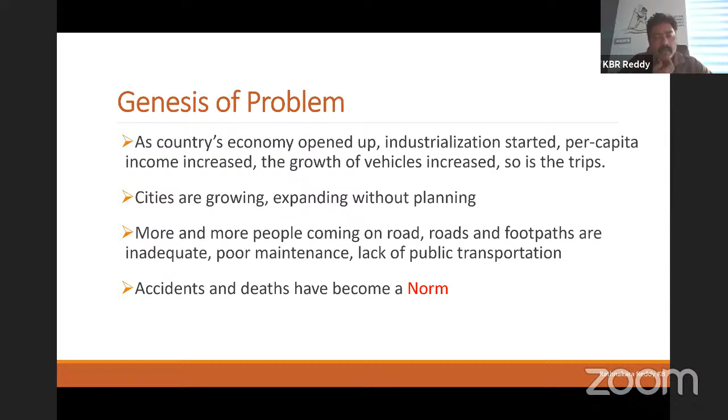Added to this, we are adding more than 200 to 300 towns every year, as per the census. So we have more than 11,000 towns in our country, and these towns and cities are growing day in and day out because of the increase in population. And these towns and cities are also not planned, they are just growing out of proportion. So again, the safety and all the issues fall in place. As there are more vehicles on the road, more people, accidents will happen and are happening.

Now, you all know that these are all managed and governed by the government, state governments or central governments. And what is the government doing? Of course, we can't say the government is not doing anything; they are doing certain things. For example, if they think the road is narrow, they are widening some of the roads, 4 lane to 6 lane, 6 lane to 8 lanes, they're adding more lanes.

If they find that a junction is a problem, they're constructing an underpass or flyover. And they also talk about building access controlled highways, called expressways. And they also conduct road safety awareness programs. The government is doing a lot of things, but on the ground, it is not reducing our accidents and fatalities.

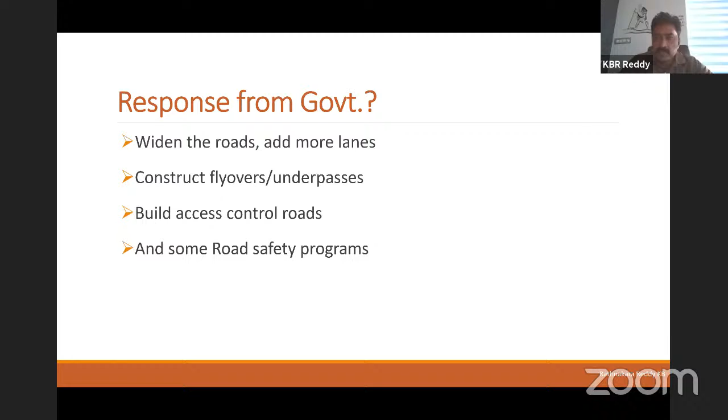If you look at the statistics of road accidents in India, these numbers are for the year 2016, but in 2017, 18, 19, except 2020 because of COVID, the accidents and fatalities have not come down. But on average, every year about 4 lakh accidents happen on Indian roads. Out of 4 lakh accidents, at least 1.5 lakh people die, and more than 5 lakh are injured. And these are all as per the recorded accident statistics.

So what it translates to is there were 1,317 accidents and 413 persons killed every day on our roads, which again translates to 55 accidents and 17 deaths every hour. And you will be surprised to see that there is one death every 3.5 minutes. So in the one hour of this lecture, about 60 minutes, roughly 15 people would have already died in road accidents. I think it is really worrisome, and it has to be brought down.

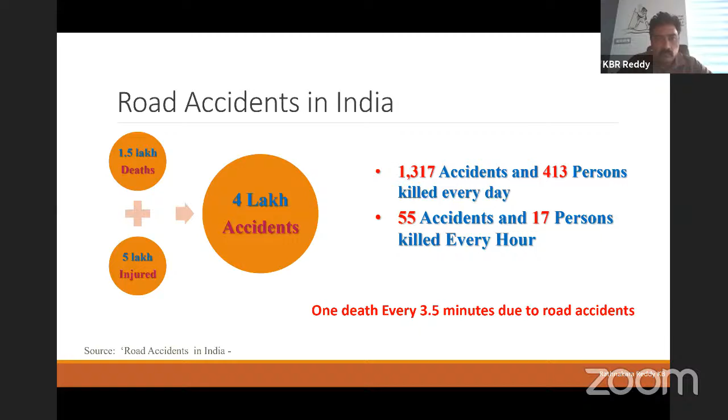Now, coming to cities. These are all states, and accidents do happen in cities, towns and highways. In cities, Chennai has about 7,500 accidents, Delhi has 7,000, Bangalore has 5,000, then Indore, Kolkata, Mumbai. So it again shows cities are not very safe, and accidents happen there very often. And if you add all these 10,000 towns, obviously you'll have more accidents.

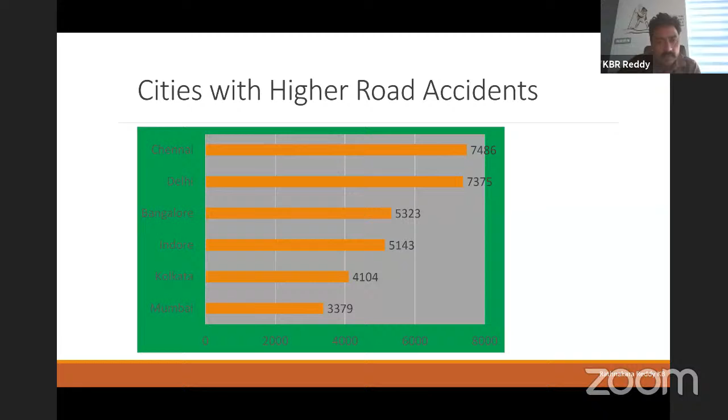We all know that the causes of accidents are many, including user behavior, driver behavior, road design aspects, infrastructure, all that. From the statistics report, a published report, 9,500 accidents occurred and resulted in the killing of 3,396 people on speed breakers. Wherever speed breakers have been constructed, they are supposed to reduce the speed of vehicles, but they have become killers.

Why? Because of lack of painting of the speed breakers, lack of information, lack of signboards which inform the driver in advance that there is a speed breaker, so they come at very high speed, the accidents happen and people die. The other contributor is potholes, especially in cities, towns, and roads that are not managed well; more than 2,300 people die just from potholes. We should be ashamed as transportation and civil engineers that we allow people to die because we have not maintained the roads well.

Then, where there is two-way movement of traffic, it is more prone to collision. If it's a single carriageway, and most rural roads are single lane carriageways, there are more accidents. On four-lane divided and six-lane roads, accidents are less, but fatalities will be more because of the speed. That's a different discussion itself.

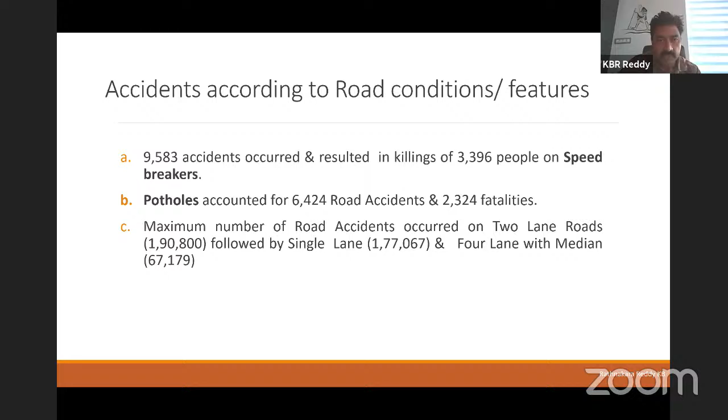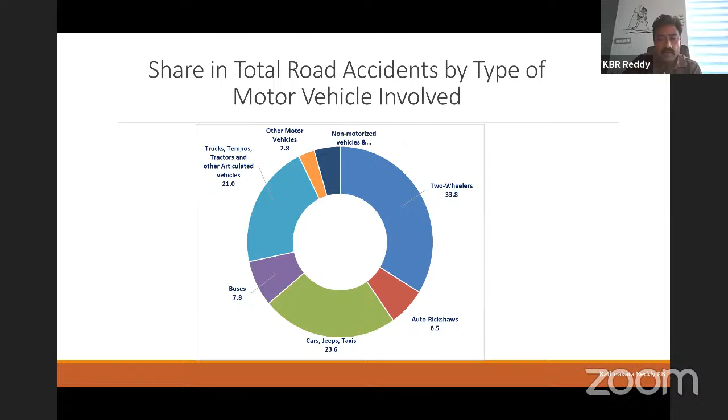So the point I want to make here is we have to see which vehicles are vulnerable, right? And whenever we are doing the design, we should make sure they're all considered in our safety aspect. And then that is the accidents slide. And if you see fatalities, the number of people killed because of an accident, with respect to the vehicle they use, again it is two-wheelers. Again, one third of the total people who die is because of two-wheelers. And next is cars, and next is your other motor vehicles.

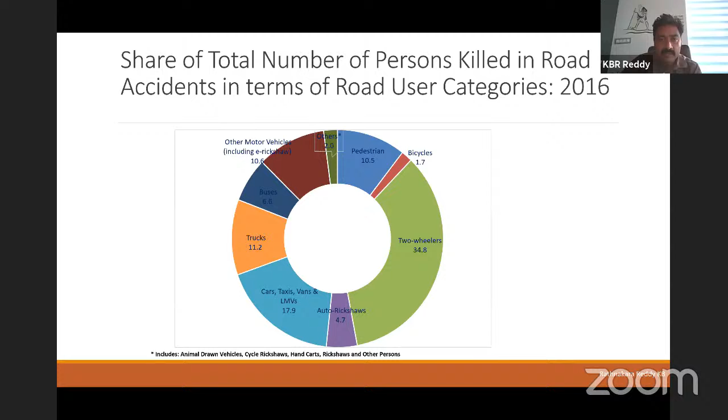So again, the pedestrians, if you see on the top in blue color, it is about 10%. And bicycles is 1.7%. Though in most of our cities we don't use bicycles any more. They will be mostly in small towns. But pedestrian accidents and pedestrian deaths is an alarming issue, and it's causing a worry for all the urban road safety engineers because we are not building safer footpaths and safe road crossings for them.

Well, then what happens when an accident happens? The police department, they are the enforcing agency. They go and record based on their information what is the cause for the road accident. And if you look at here, the majority, more than 80% of the reason is fault of the driver of the motor vehicle. Driver fault is more than 80%. And then you have all minor things, okay? But if you see the red color what I marked, engineering or designing fault of roads, defect in road condition, it is very minuscule.

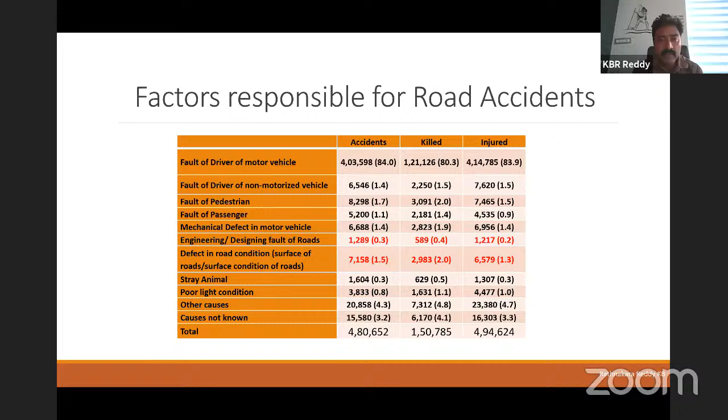But don't get misled by these numbers. What happens in an accident report is the insurance aspect is also attached. So it's a long theory. They will make sure that it is not because of any design fault of the road or anything. If they really did that, the insurance will not be able to be claimed by the person who made the accident. That's why they give all other reasons. But we must all know that there is a significant contribution of our road design and road infrastructure in the accidents.

So when we say safe or safer or safety, what does that safe mean? Safe, in terms of the design of our roads and road infrastructure, means safe and comfortable for pedestrians, first priority. Safe and convenient for vehicles. Safe and hassle-free for the houses or establishments to get access. And safe and sustainable for the environment. So all these are part of safer designs, right?

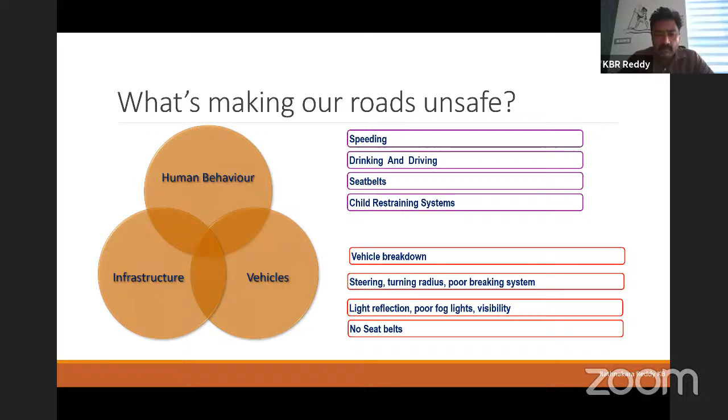And when we are making the road infrastructure safe, or looking at what's making our roads unsafe, there are three major aspects. One is we've got a road, we have a vehicle used on the road, and we have a human being, that is ourselves. We are using that vehicle and we are driving on the road infrastructure. So human behavior, vehicle, and infrastructure. There are various parameters that go into each of these three aspects. So we are interested in infrastructure.

So we'll talk about infrastructure, because there may be driver mistakes, driver errors. They'll always be there. Even if you design the best road, the best intersection, chances are there might be an accident because the user of the vehicle may end up not really using it properly. So in the infrastructure or road, we have three stages. One is on the planning side, another is on the design side, and the third one is on the maintenance.

So when we say planning, where should we plan? For example, if you are designing a new national highway or a state highway, a new road. Now, if we go back as civil engineers, you might have studied transportation theory or highway design in your undergraduate, and you would have touched the basics of highway engineering, highway planning and all. In one of the chapters of highway planning, they say your road should connect to the villages, connect to the cities. That's how we learn highway planning. But in the current situation, it doesn't hold good.

When we plan a high-speed road, we actually plan away from the city and away from the town. Why? Because getting into the town is very unsafe. The speeds will come down, it's prone to accidents and all. So we go away. So planning makes a big impact in making roads safer. If you don't touch any of these towns and villages, your road will be 50% safer. And if you plan elevated junctions, flyovers, underpasses, then you are solving another 25% of accidents.

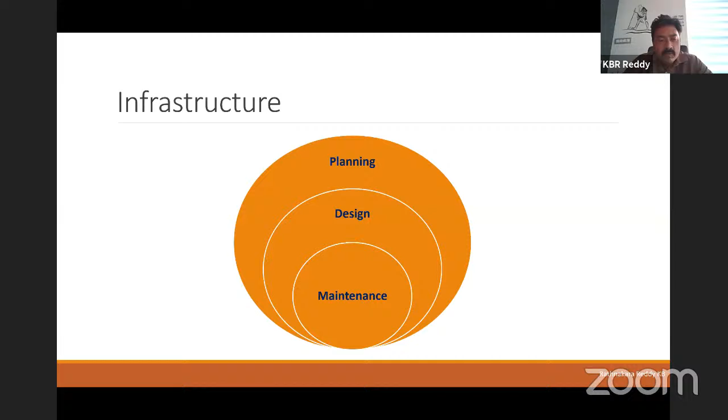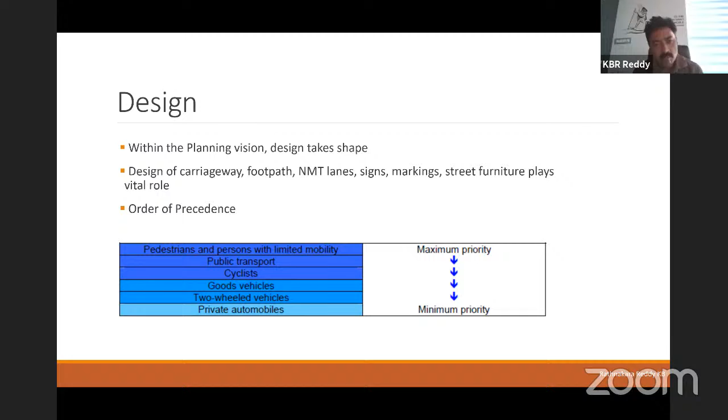Now, this is contrary to what we practice in our country. In what we practice, whenever we design a highway, we give priority to the vehicles. We start from there. But now all the safety experts and road design engineers are moving the other way around. So we are prioritizing where to start. First is pedestrians and persons with limited mobility. That is your maximum priority. Then your public transport, then cyclists, then goods vehicles, then two-wheeled vehicles, and then private automobiles. This is the priority we are moving towards in the design of urban streetscape. We are ensuring more safety and access to non-motorized transport, and then move towards motorized transport.

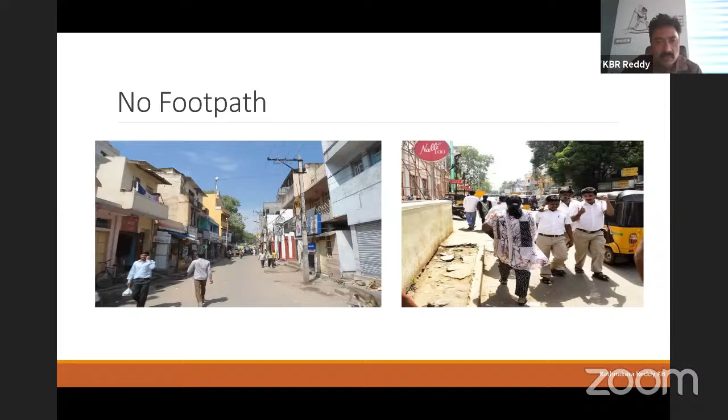For example, these are some of the designs and works we have been doing. This is a photo of some streets in Bangalore, but you can all relate this to your own towns, your own cities. If you look here, we have a road, but there are no footpaths for people to walk. In the absence of footpaths, people will walk on the carriageway. And if you are on the carriageway, you are interfering with the space meant for vehicles, and the resulting consequences are accidents, right? Elsewhere you have very wide footpaths, but there is no space for people to walk. In the absence of space to walk, they will again enter onto the carriageway, and again it leads to accidents.

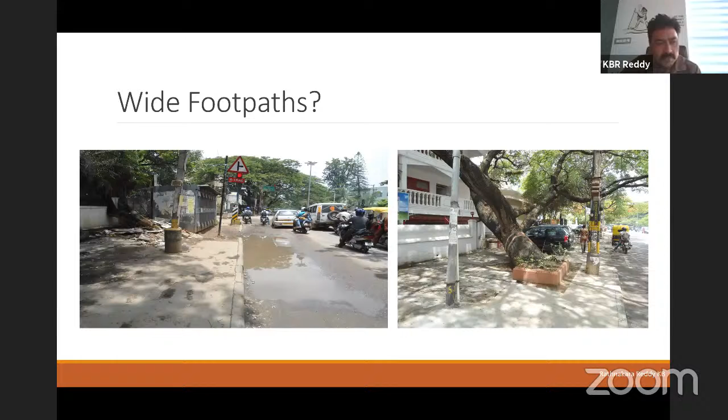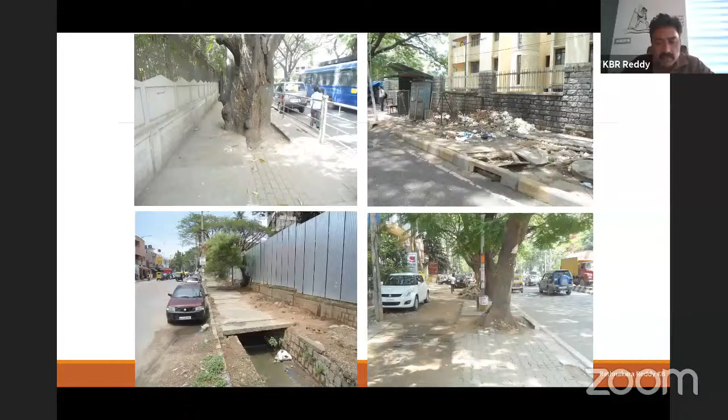Then you have some footpaths, but there are so many obstructions on them, or you dump a lot of things, or you don't give proper drain slabs and all. People walk on the footpath and trip on these surfaces. Then there is unsafety. Then you have seen this very common way people cross the roads: traffic police put some barricades, and people try to cross over those barricades, again unsafe.

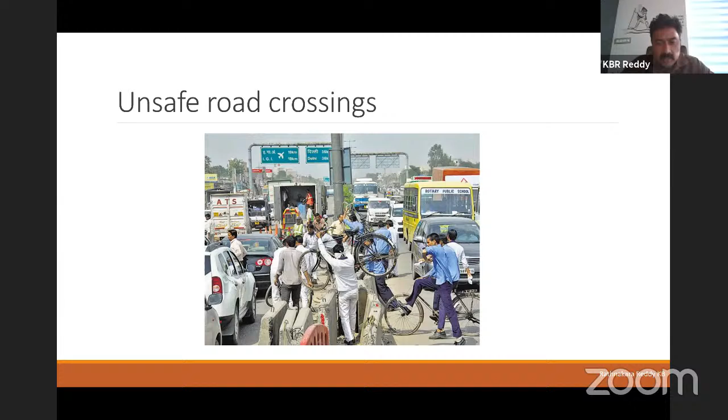Then come to junctions. In every town, every highway, every city, we have junctions, and junctions are very accident prone. Of all the accidents, up to one third happen at junctions, right? And if you don't design, if you don't channelize, it is open for anybody and everybody to go in whichever direction they want.

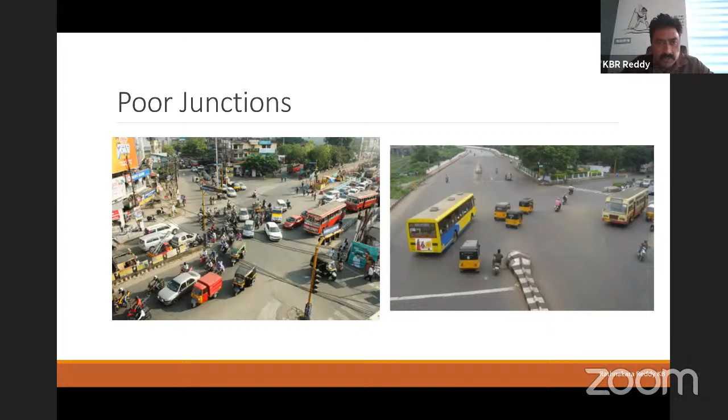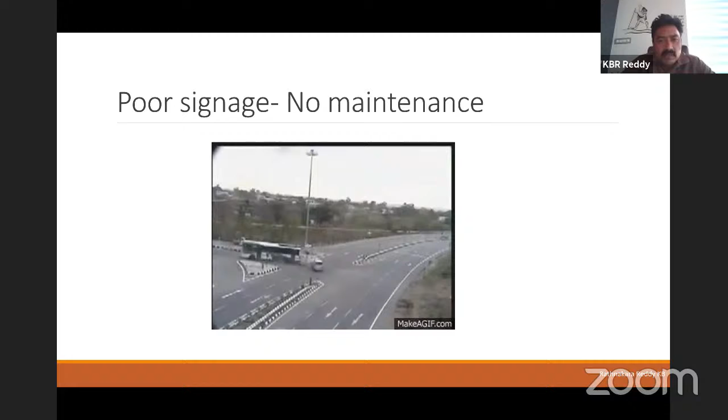And the maintenance part: if you don't maintain something like this, it is bound to cause accidents and loss of people. If you see this old video from our own highways, this is a fairly well-designed junction. But you see the accident in daylight, only because there are no signboards, no indications that vehicles are moving here, and there is no signal. You can never have a junction like this with no signal. So the accidents do happen.

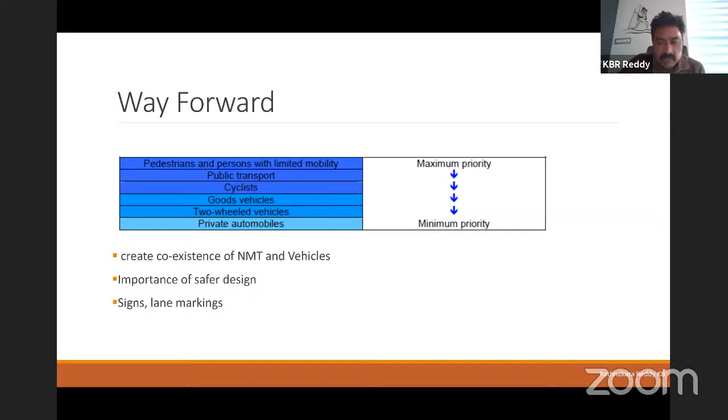So the way forward is look at this priority, and then make sure we design the infrastructure in a right way. So I will just take you through one or two design junctions that we have been designing. This is a road in Bangalore. This is an airport road in the city.

So when we went through this entire stretch of about 6 kilometers, we found there are junctions which are to be redesigned, not very safe. So basically, we identified which are the bottlenecks, and the objective for us is to make sure the junctions are designed and made safe, and also allow the through traffic to move continuously, hindrance free. Okay.

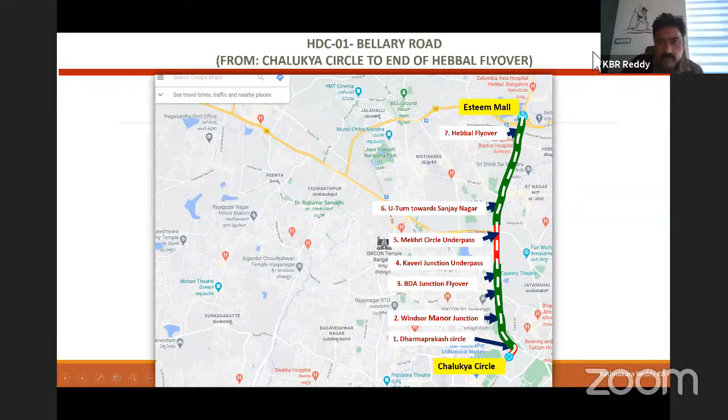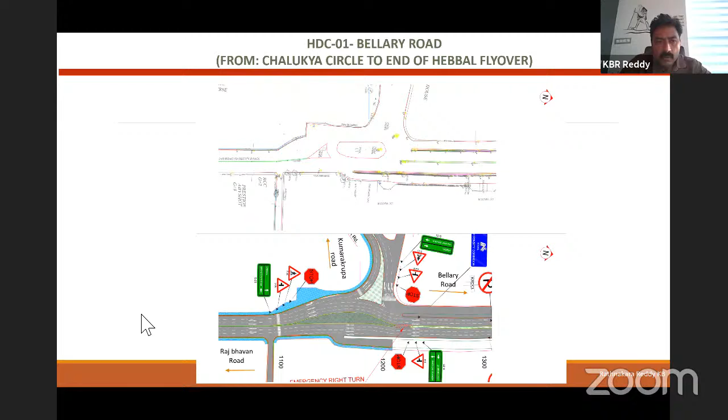So we have one more junction. Just give me a minute.

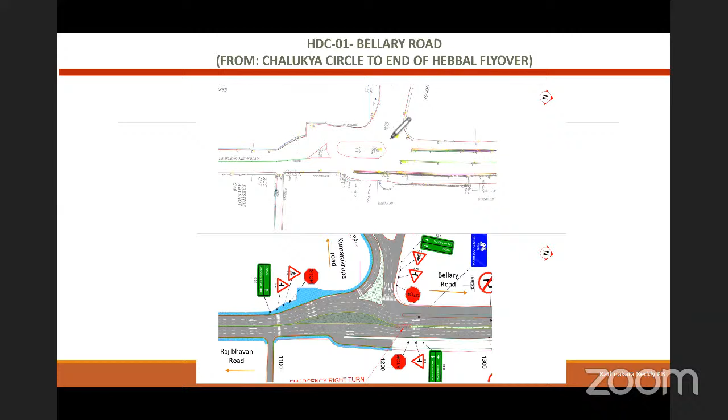Okay, so if you look at this junction, okay, now this is a three-leg junction, and what's happening here is, again, a kind of island is created here, and there is another channelizing island. So the vehicles would come like this, wait here for the signal, take a U-turn like this, go here, and these vehicles come here. Look at this geometry and all this.

Okay, so they'll wait here for the signal, and they go all the way like this, right? And the right turning traffic here, again they come here, take a right turn like this, and go based on the signal or traffic police directions. So what we did to this junction is this.

We actually closed this median, right? And there was already some kind of mural present here, and we did not want to remove that. That's why we created a kind of landscape like this, so that the mural is protected, and also we'll have a smooth geometry. So what we made essentially here is we closed this median and made all this movement through.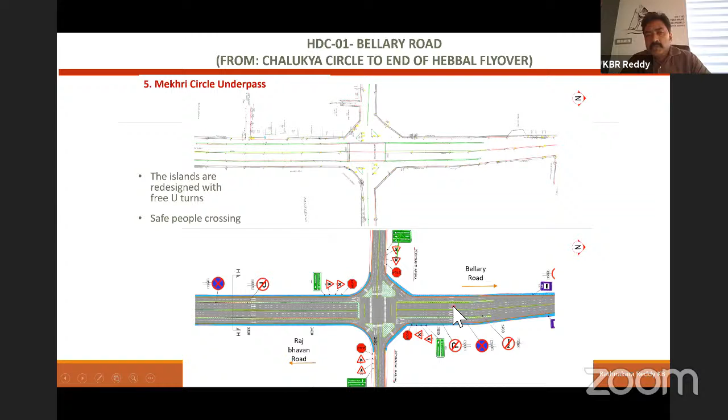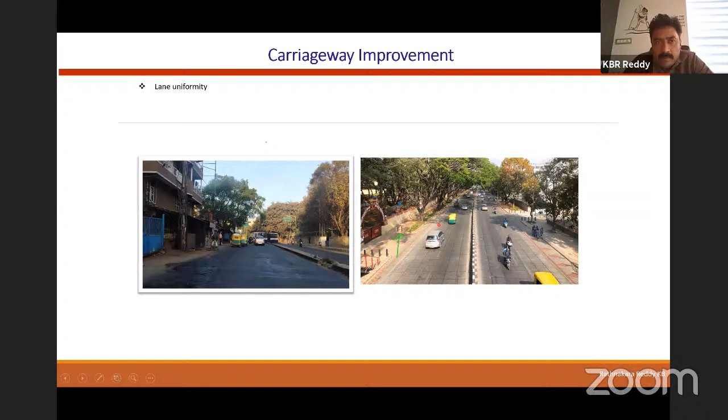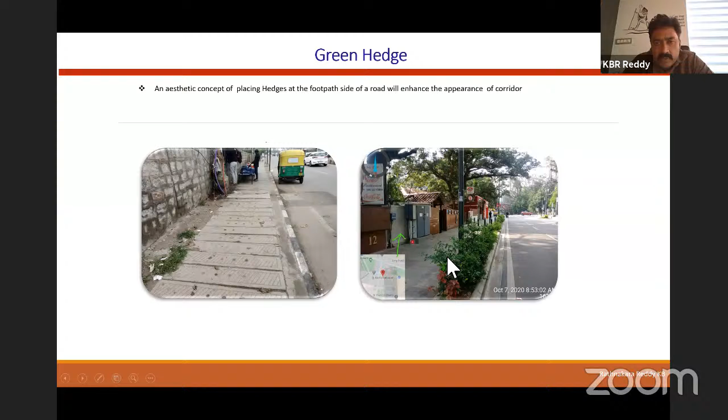So like this, all these junctions have been redesigned. And then the carriageway, the median, the footpaths: if you see a road like this on the left, we easily converted it to a road like this on the right. These are all in the design. Footpaths, this is how the footpaths work. You convert these footpaths into safe and walkable. Same again, this is how the footpaths convert into safe, walkable ones with some greenery, a pleasant appearance.

Then, now you might have heard, in Bangalore we are doing something called TenderSURE design of roads. Then we are doing smart cities, and now throughout the country everybody is taking those design aspects. The idea is, if you have a road like this, you've got about 4 lanes or 3 lanes and footpaths like this. Can we make this an inclusive road, so that there will be fast moving vehicles, slow moving vehicles, and all? How about converting this road to something like

this? You have a road like this, a couple of lanes, and a narrow footpath. Just convert this into still your 3 lanes. You create a cycle lane, then you create a good footpath. There is a traffic signal for safe crossing. There's a raised pedestrian crossing. Look at all this. Can you make this road more lively? How dull and boring this road is, and how safe and vibrant this changes.

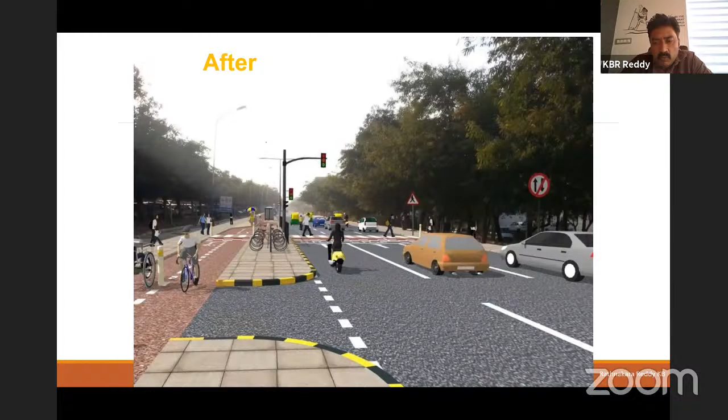And this is what people now want, and the planners and the designers are also working towards making these urban roads and streetscapes more safe and vibrant. Similarly, we have a metro going on, and it's fairly good. This footpath is good, and you've got a good carriageway here. Someone might say, what's wrong with this? There's nothing wrong with this. But we can still make it more inclusive. Do something like this.

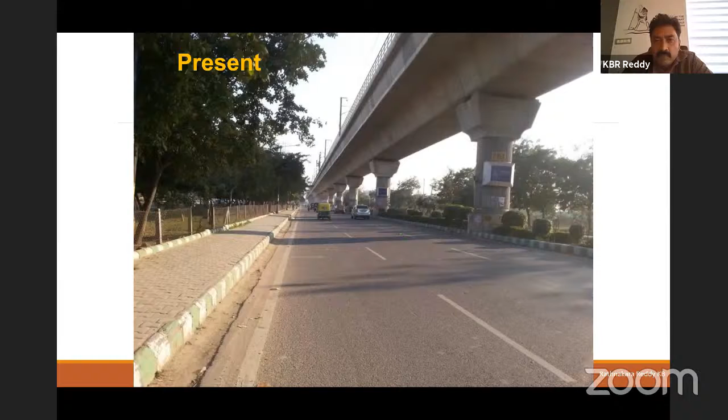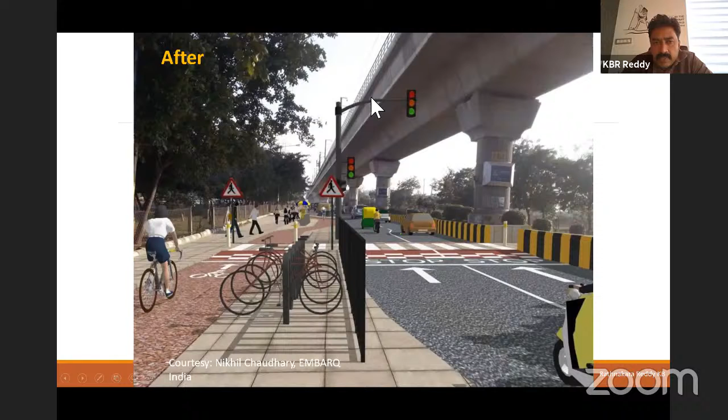Vehicles will be here, people will cross here. If you look here, this entire length, there is no space for people to cross. So do you expect people will walk about a kilometer, cross, and then walk back a kilometer? No, it's human psychology. They would like to take the least possible walkable route. They will simply walk here, jump here. And by doing that, some will not really anticipate the consequence, and then the accident will happen. Instead of that, create like this: good footpath, cycle lane, a place to cross, safety signboards, everything.

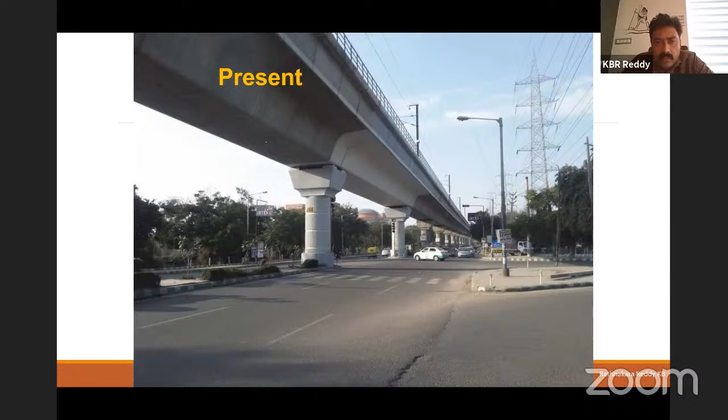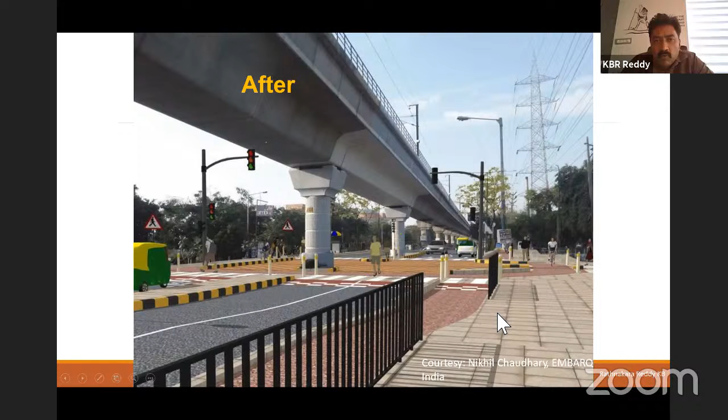Now, the other one. This is also fairly good, but obviously there's no footpath and all. This is not in Bangalore, this is in Delhi. Now look at the change. And you still have the carriageway. Again, this is inclusive. This is more vibrant, more safe, and more inclusive.

So, in a nutshell, the point I'm driving at in this lecture is that as all of you civil engineers graduate and become good urban designers or road designers, keep the priority in mind while you're designing, from the most vulnerable to the least vulnerable, that is, non-motorized transport to motorized transport. And the road should be inclusive in all respects. It should be usable by people to walk safely, cycles, two-wheelers, cars, and then trucks.

At the end of the day, we spend a lot of money, we talk about big projects, and we want to build bigger cities and more cities, but we forget one fundamental aspect. All this we create for us, the people. If these things are not safe for us, what's the point in building roads, cities, towns? They're all meant for access and movement. It is for us. They have to be very friendly for people, and they should not become death traps.

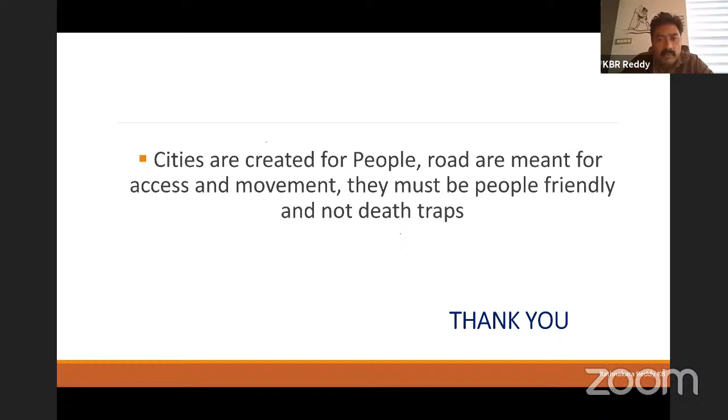Yeah, thank you very much, sir. Are you able to hear me, sir? Pardon me? Are you able to hear me? Yeah, thank you very much, sir.